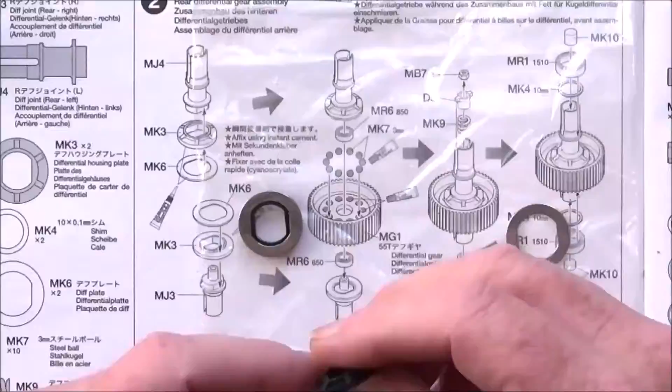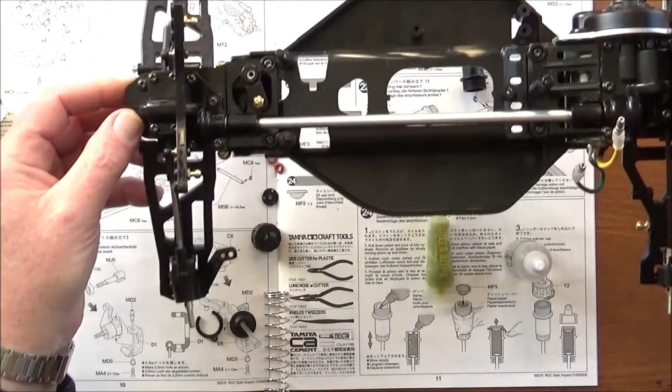Hello and welcome to the next video of my build series on the Tamiya Dark Impact on the DF03 chassis. We left off last time after installing the front gearbox and the lower and upper A-arms, wishbones, control arms, whatever you want to call them.

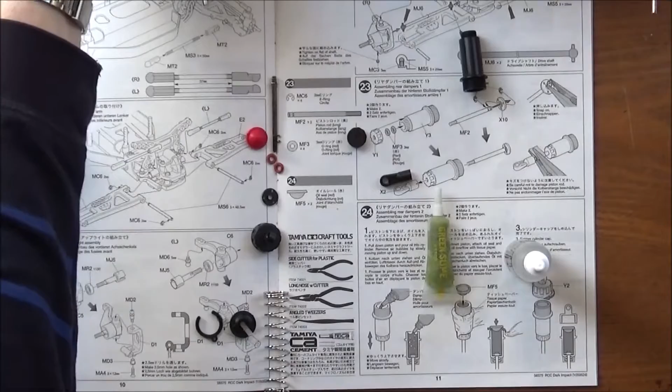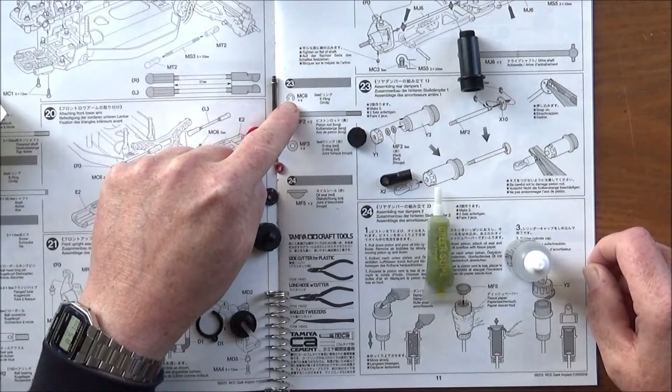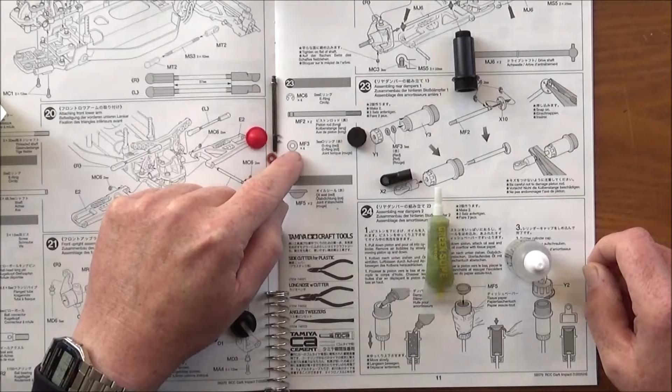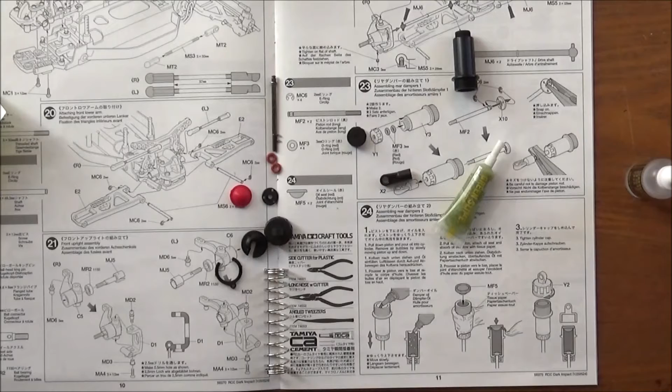For this one we're going to start off on steps 23, 24, 25 and 26 all in one, which is making up and installing the rear shocks. Parts needed: 2 off Y1, Y3, X2, and on step 23, 4 off MC6 2mm E-clips, MF2 the piston rod, and 4 off MF3 3mm red O-rings. For step 24 we need 2 off MF5, the red oil seals, and plastic parts Y2. For step 25 we need 2 off X5, 2 off X6, and 2 off MF7, the coil spring.

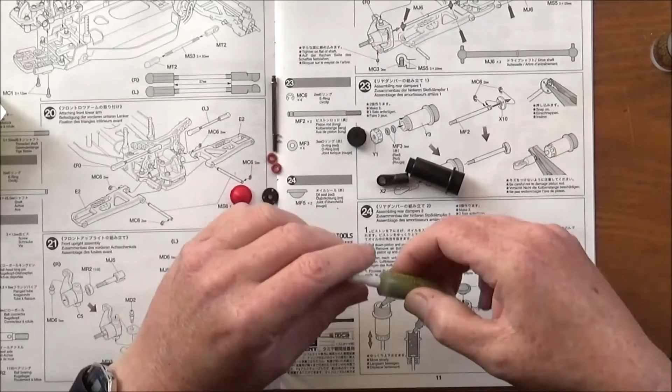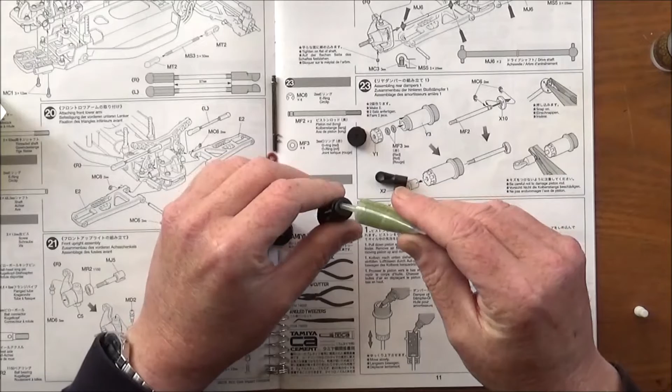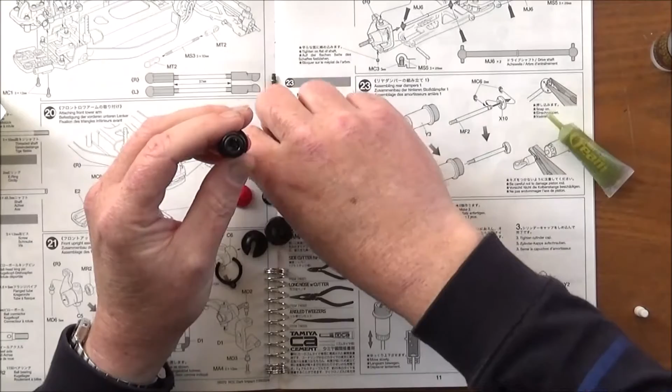So we'll get cracking and get straight into it. I've also got my green slime to hopefully stop any oil leakage, but this is quite thick oil, so you never know. We're going to start by building the body - I'll get my green slime and squidge it into the bottom of the body, and get one of my O-rings and place it in.

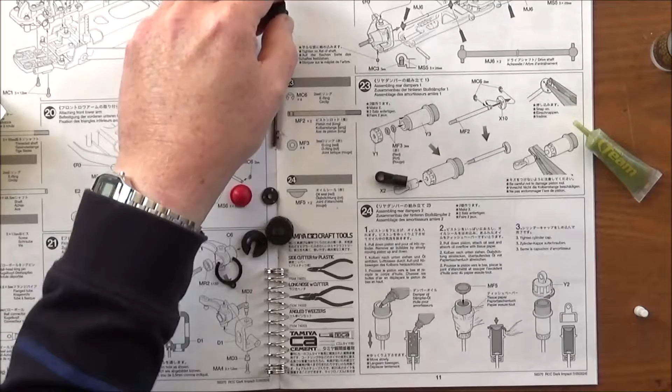Then Y1, and I'm just going to lightly start the threads on that. Then we go to the piston rod - I've already put one of the E-clips on in front of camera. Then we take X10, the piston itself, the 3-holed one, slide that over, then the next E-clip, and there we have it in one go. Woohoo!

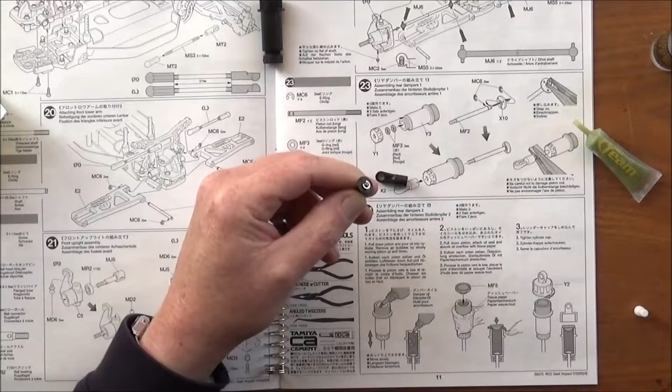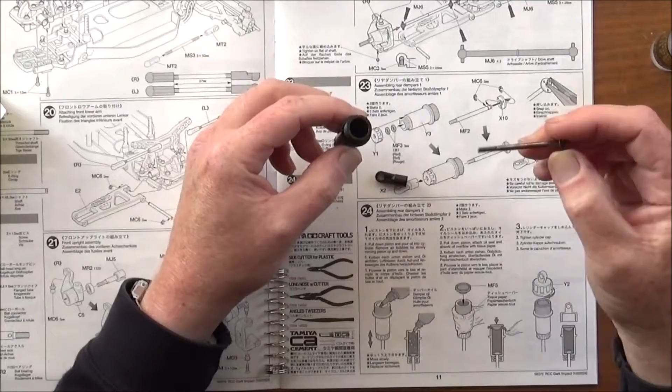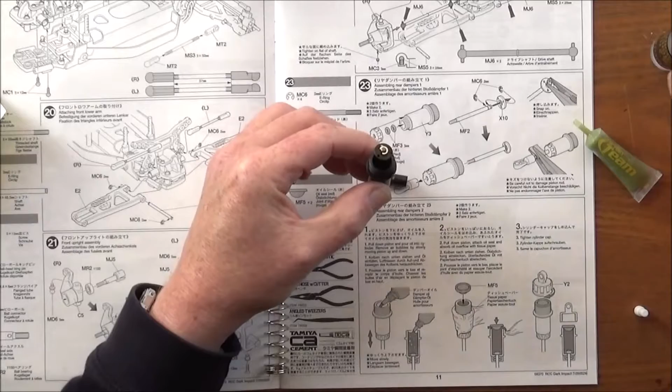Surprisingly there's no note here about oiling this, which they normally do for these CVA shocks, but hey, I've got all that green slime in, so I'm just going to push it down a bit like that, and then we're going to move straight on to step 24.

I'll put that X2 ball connector on shortly, and I'm just going to fill it up with this really thick oil, I think it's 1000 weight. Normally this helps alleviate air bubbles, but I can see air bubbles as I'm squeezing the oil out because it's that thick.

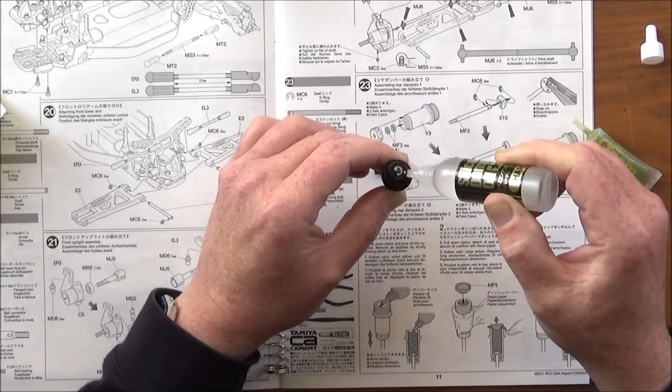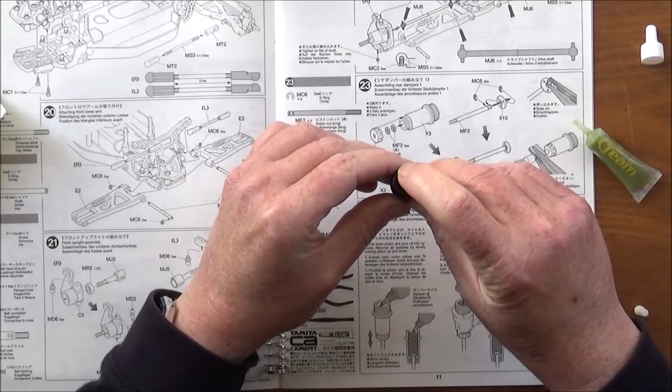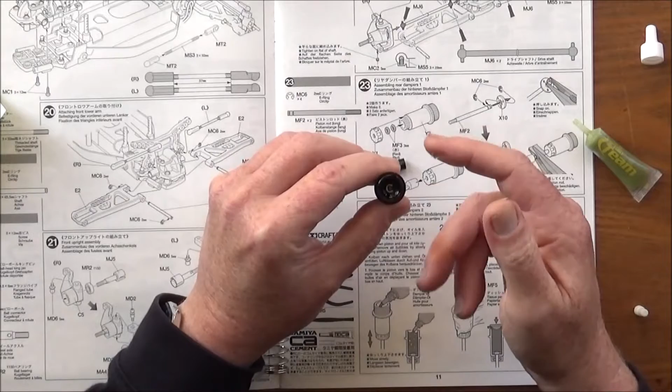I think that's about enough, might be a bit too much. I'm just going to gently ease it in, and then pull it down very slowly, working it up and down to check - now I can't see any air bubbles, so I'm going to bring it back up to roughly 3/4 of the way up the piston body.

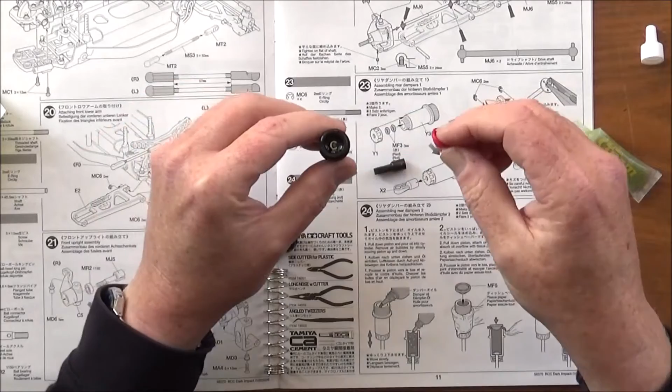Then we take part MF5, the oil seal, and pop it in. I think I've just about got that right - there's just a bit of oil seeping over the top, but very little. Then I'm going to screw the cap on.

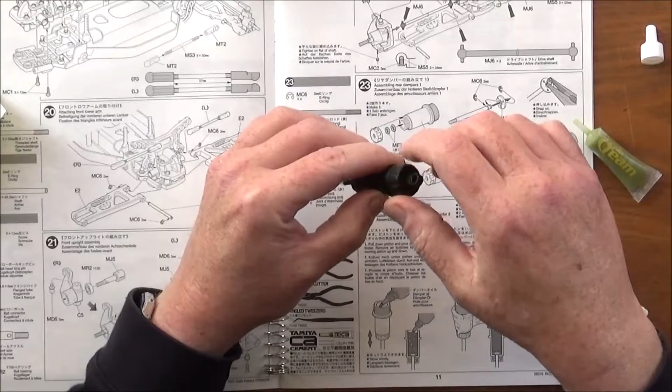Then we can do the bottom cap. Holding both of them quite firmly, I'm going to tighten them both together, and hopefully that's the piston installed - a little bit of rebound, but not much.

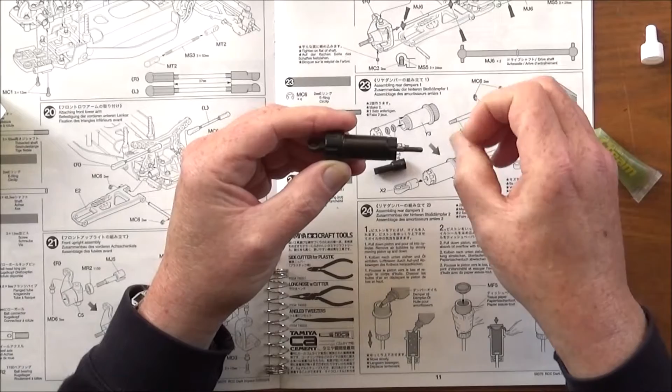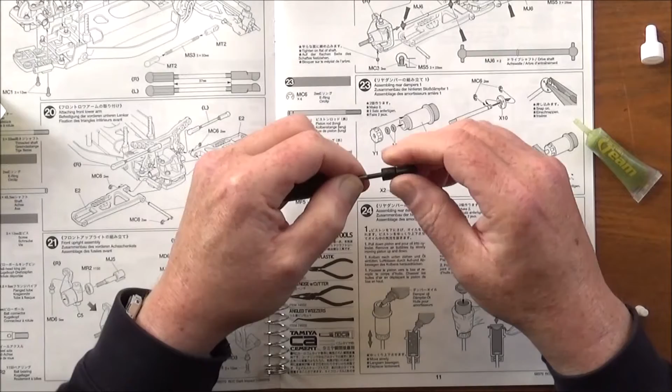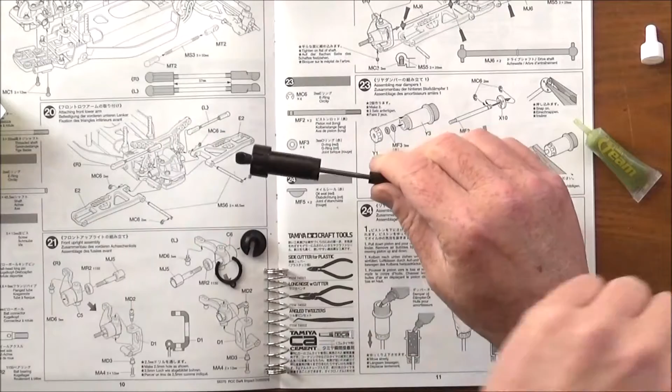Then we can move on to the ball connector. Some of these have already got the threads, but these ones don't, so I am going to need my pliers eventually just to nip them up. I don't bother with any protection because I grab it right near the end, and that's about it.

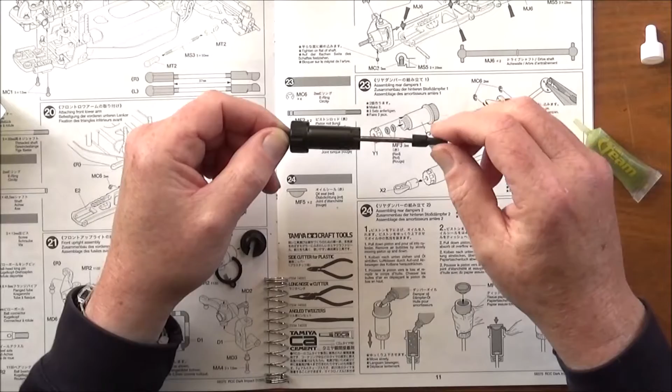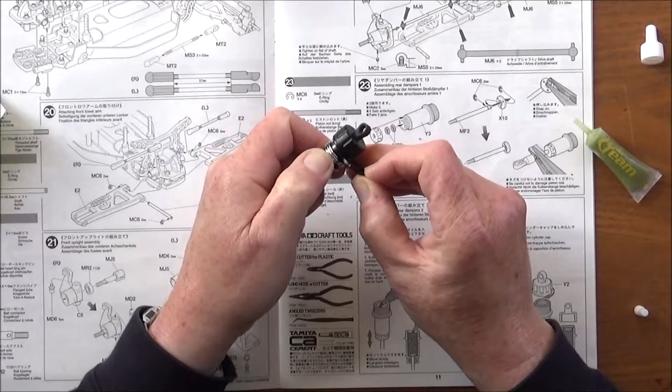So there's the shock, and surprisingly there's still quite a lot of thread showing, which I've not seen before. Then we can take the spring and pop Y2 over to hold the spring, and there it is, virtually complete. Then we get X6, which is a pre-tensioner, and pop that on. I'm not sure whether I'll keep that on, but there we go.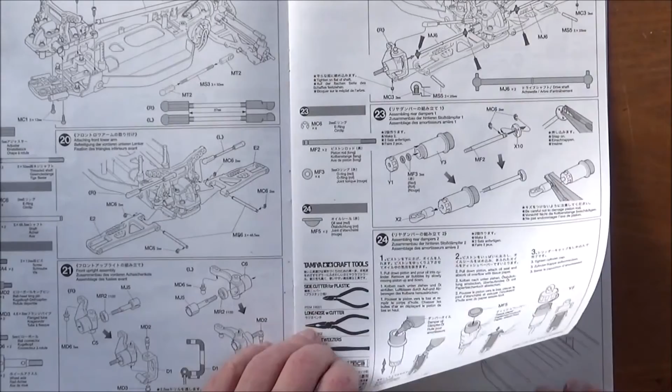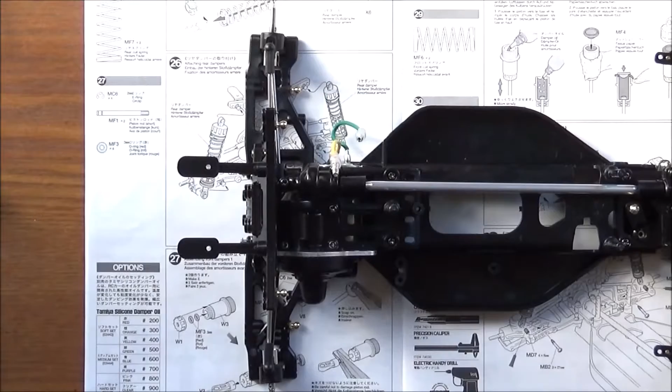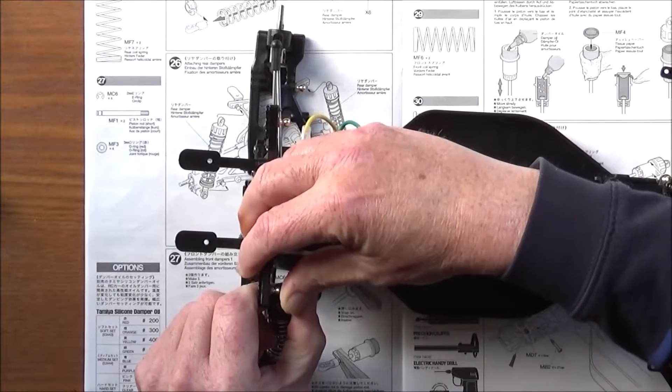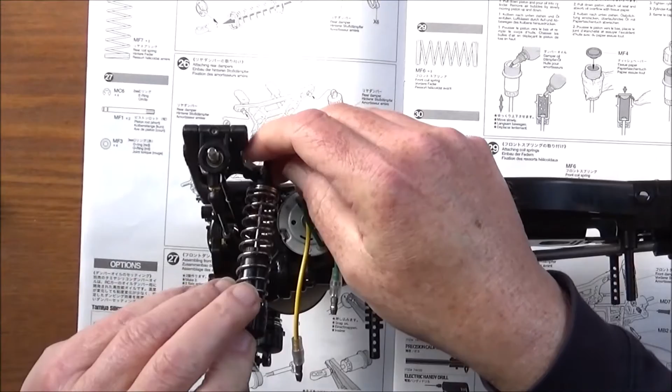Right, so if we turn the page quickly, step 26 is just installing the shocks onto the rear of the car buggy thing. So we can just get the buggy and take one of the shocks and hopefully just pop it in, like that, and the same on the other side. And there we have the shocks mounted.

And we can move on to 27, which is building the front shocks. Steps 27, 28 and 29 are making up the front shocks, and really it's exactly the same as the rear shocks, so we might have a bit of a musical interlude.

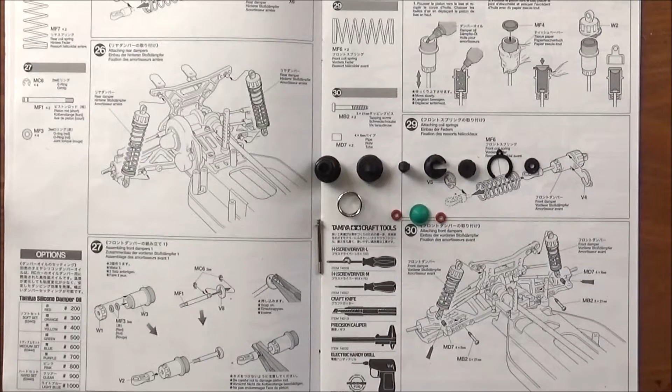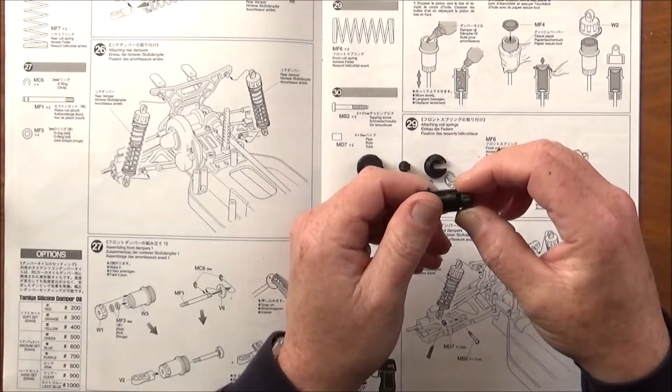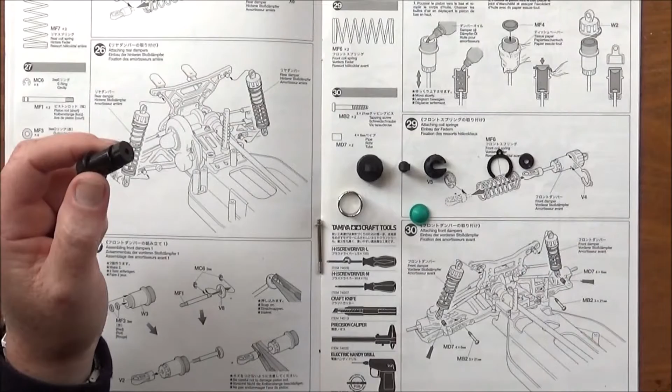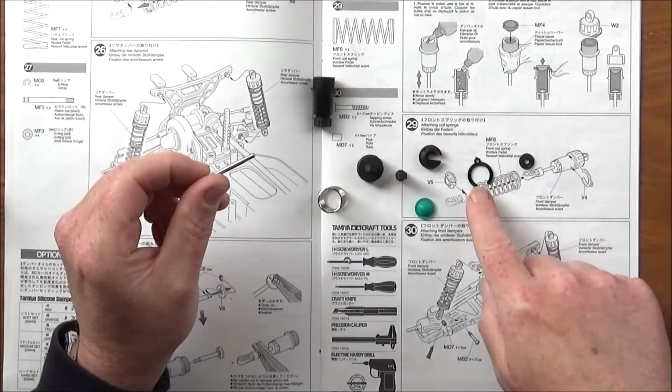I've just remembered I forgot to go through the parts list, so while I'm doing this we'll go through it. We have 2 off W3, the bodies, W1, the bottom end caps, MF1, the piston rods, V8, the piston itself which is the single-hole one, which I've not seen before, and V2, the end ball connector. Then we've got MF4, the green oil seal, MF6 the spring, V5 the spring retainer, and V4 the thinnest of the spring tensioners. So I've already put the first E-clip on this, there we go.

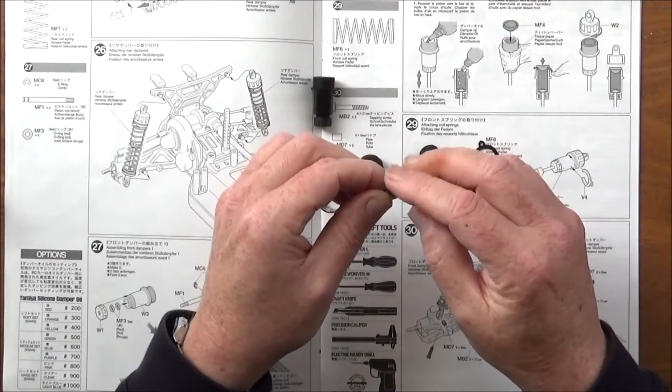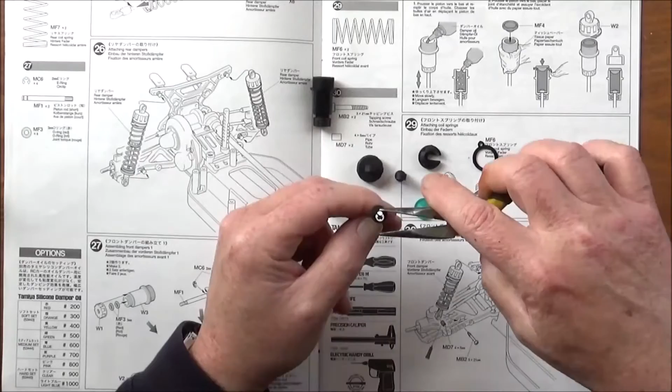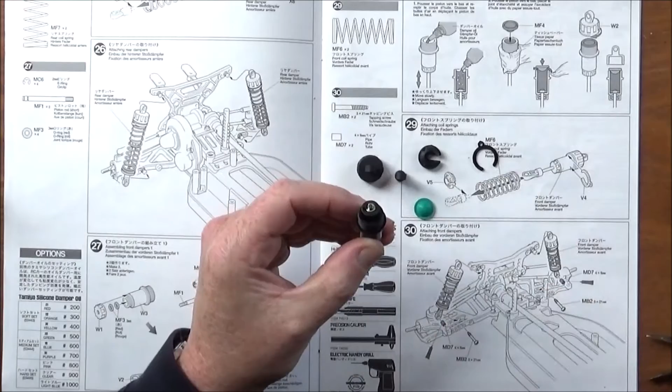And we get the second E-clip. Can we do 2 in a row? There we go, second time's a charm. Again, hopefully I can just pop this in - yeah, that should just be enough. Same oil - I mean, that is a bit too much, but hey.

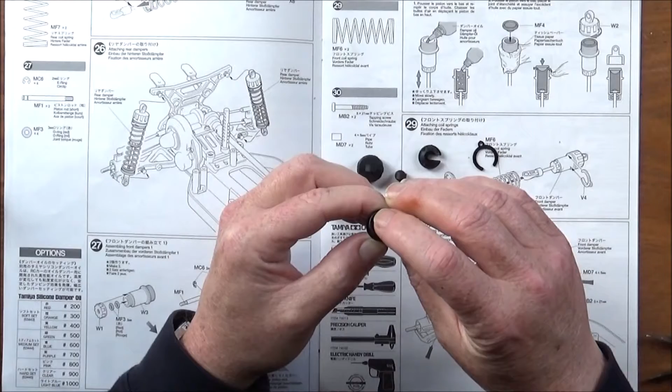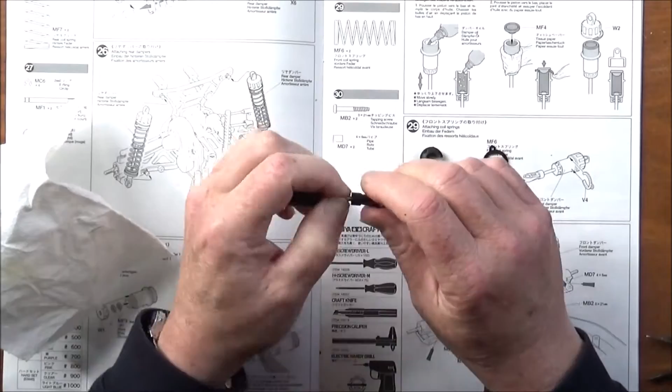Again, we gently ease it down, and we squash it down, squish it, squash it. Then pop the cap on, and there we have one front damper.

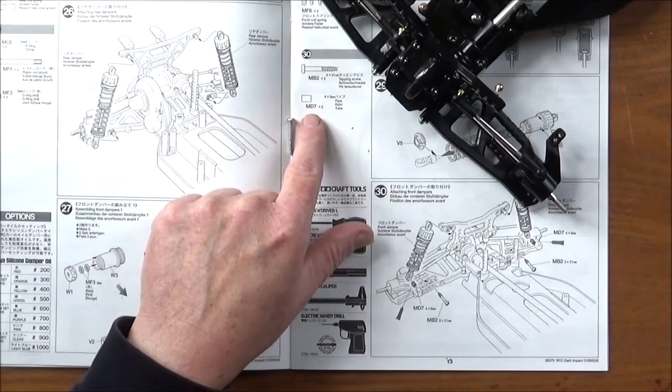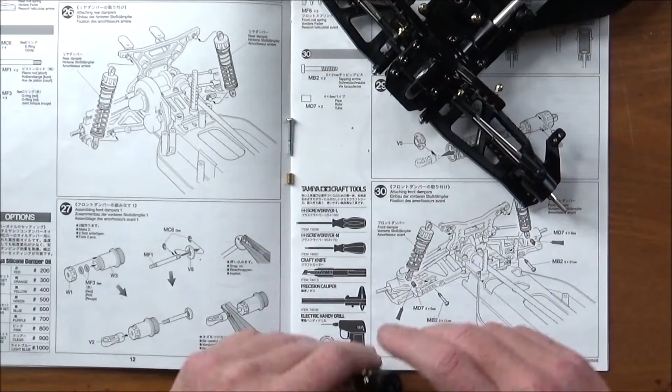The last step in this video, step 30, is installing or attaching the front dampers. For this we need 2 off MB2 3x21mm tapping screws, 2 off MD7 4x5mm brass tube or pipe as Tamiya call it, and obviously the dampers. You take the MD7, pop it through the bottom connector, get your screw, and as usual, because I'm on camera, stuff falls out, but hey.

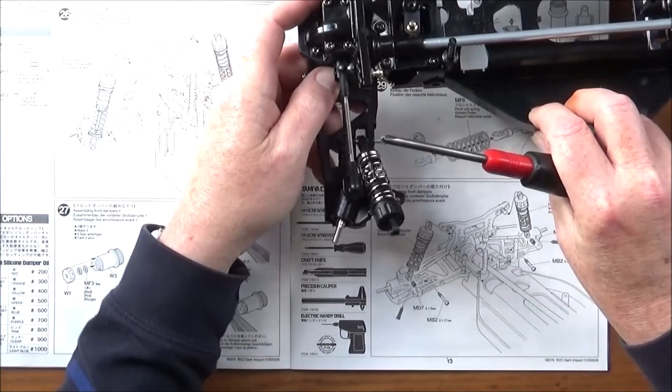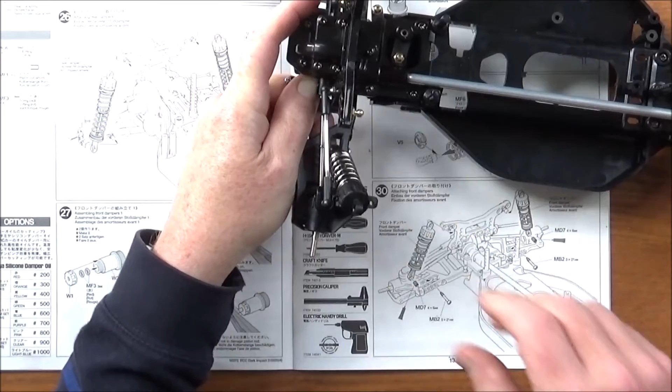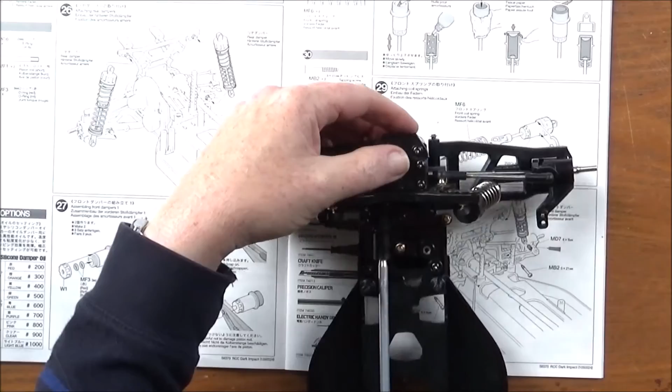According to the diagram, this goes in the hole closest to the chassis, and it should just push through - a little tricky, but you just screw it in. That's the bottom one, and the top, like the rear, simply pushes onto the ball joint, like that. And there we have the front suspension, shocks mounted, both installed and working, and hopefully with that green slime I won't get any leakage or seepage.